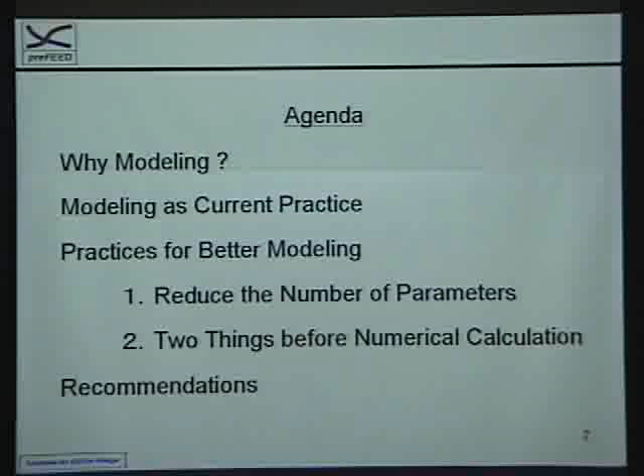Let's talk about the first topic of why we have to focus on modeling.

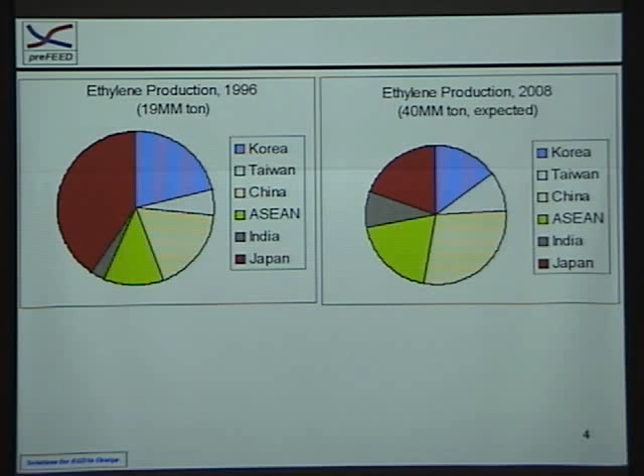And I hope modeling will be the key to the differentiation between different countries and different companies.

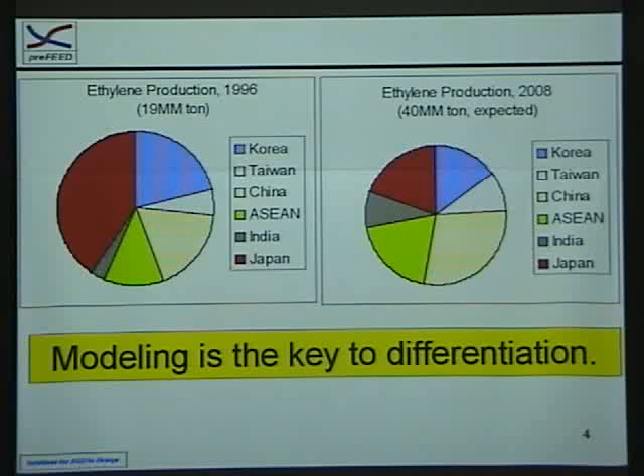I would like to explain modeling practice as current activity.

This is the old diagram, the McCabe-Thiele diagram, and those who are younger engineers may not be familiar with this, but this is technology back in 1970. We had to use this kind of diagram to design distillation columns, such as acetone-water distillation. This technology was limited to the binary system, a two-component system, and we couldn't consider the heat balance.

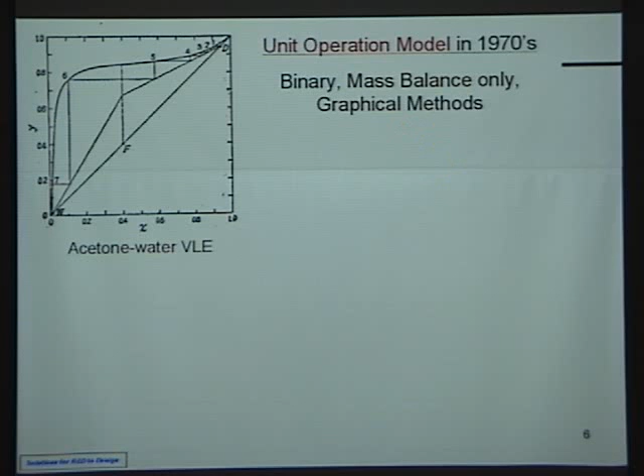We consider only the mass balance, and this was a graphical method. So if you have the VLE very close to the operating line, then accuracy depends on the accuracy of the VLE. So the graphical method didn't give us high enough accuracy back in 1970.

And today, well, this is 1990s technology. We enjoy quite a big improvement from this innovation.

This is a model of the distillation column today. We can consider heat to the trays, side draw, decanter, and we can also consider vapor distillate. So we can consider many operating conditions these days.

The difference we have is the multi-component, stage-to-stage calculation, heat and mass balance calculation, and we can also use three-phase distillation calculation.

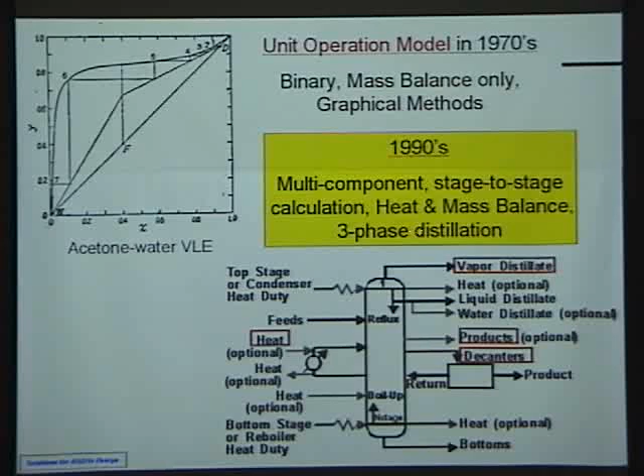Let's consider the VLE model and how we have made progress in representing the VLE. This is acetone-chloroform VLE, which is known to be very difficult to represent.

Back in the 1970s, empirical activity coefficient models were used quite extensively. This is Margules' equation, and we can see this Margules' equation reasonably fits well to the measured data of the P-X-Y diagram.

But if you look more closely at the accuracy of representing the PXY diagram, then we can find big differences, errors, in correlating the result. So these are the errors in correlating the PXY diagram.

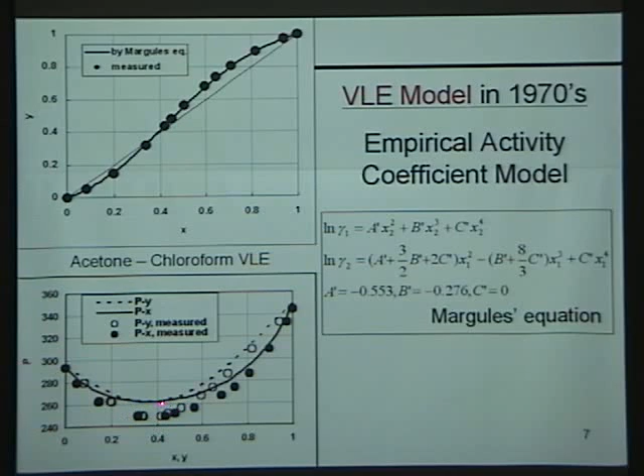As a result, a new, more rigorous method was developed by Prausnitz, and this is the UNIQUAC equation. There are many parameters, but using this more rigorous method, we can now rigorously represent the PXY diagram of the acetone-chloroform system. So again, we are now enjoying the benefits from the development of technology over the last 20 years.

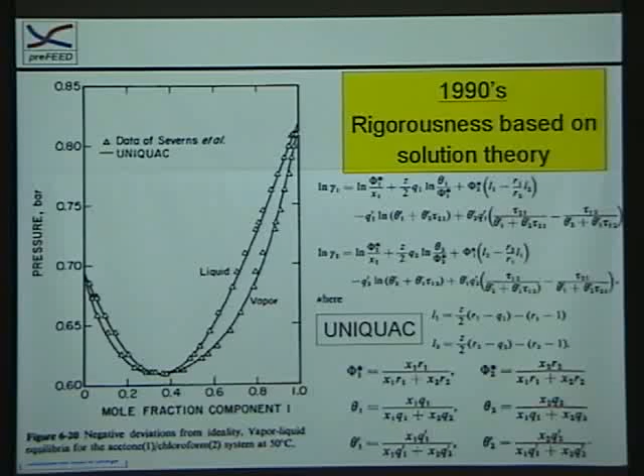So I would like to mention that in modeling and current practice, we are getting benefit from the rigorousness to represent data. Every day, all the engineers in industry use process simulators to calculate at this rigorous level.

My topic today is related to another aspect of these modeling methods. I would like to briefly explain the shortcomings as well. The first one is if you want to use a model like UNIQUAC, we have to prepare many parameters.

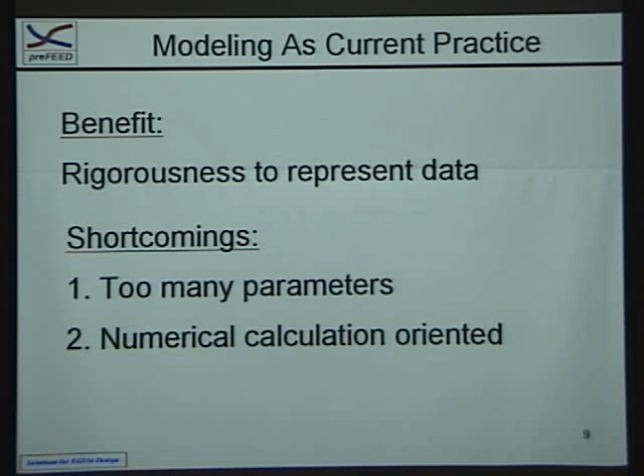And also, I would like to discuss the shortcomings related to numerical calculation orienting. Because computers have progressed over the last 20 years, we can now perform very complex calculations. But at the same time, there are things we have to do before we start a numerical calculation. So I would like to touch on these two points.

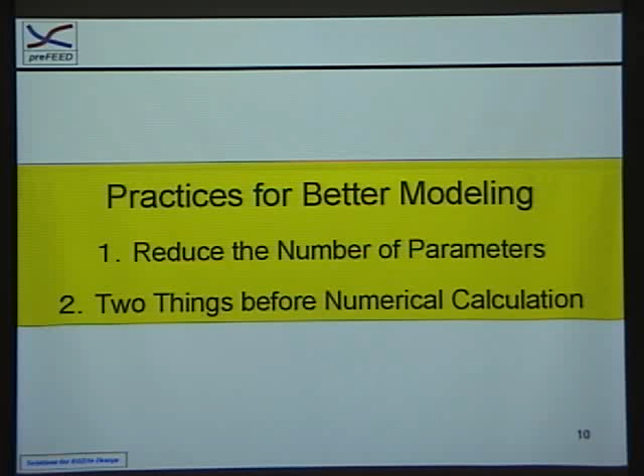Regarding the practices for better modeling, firstly, I would like to talk about reducing the number of the parameters and then two things before numerical calculation.

Let's talk about the Antoine equation as an example related to the number of the parameters. I guess everyone in this room is familiar with Antoine equations, which is related to vapor pressure representation.

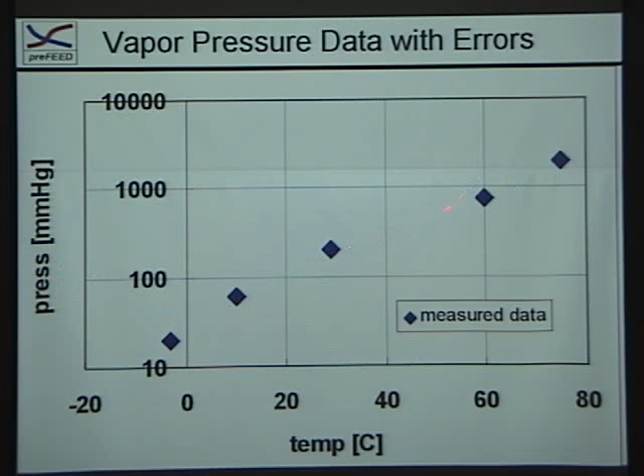Suppose we have a vapor pressure measurement, like temperature versus vapor pressure. We have some errors, of course, in this experimental data. There are actually many equations available to represent vapor pressure. The most well-known one is the Antoine equation. The Wagner equation is also well-known, which is applicable close to a critical point.

The DIPPR equation is also familiar, and extended Antoine, this is in case of the AspenPlus representation. So we have these equations.

I would like to show the comparison of Antoine equations and extended Antoine. In case of Antoine, I just set C equal to 0 so that we have only two parameters for the correlation. In case of extended Antoine, I use the parameters from A through E, a 5-parameter equation.

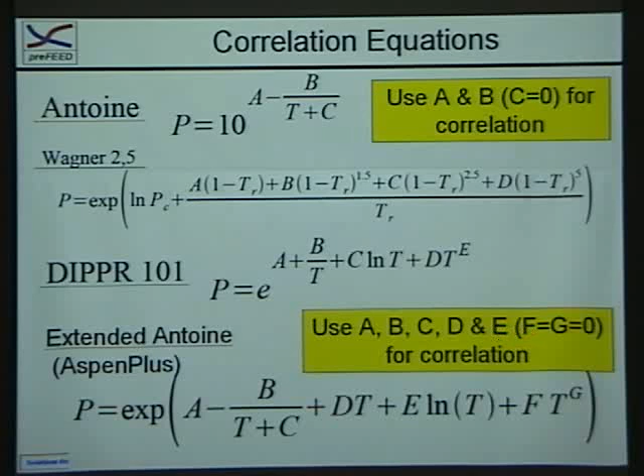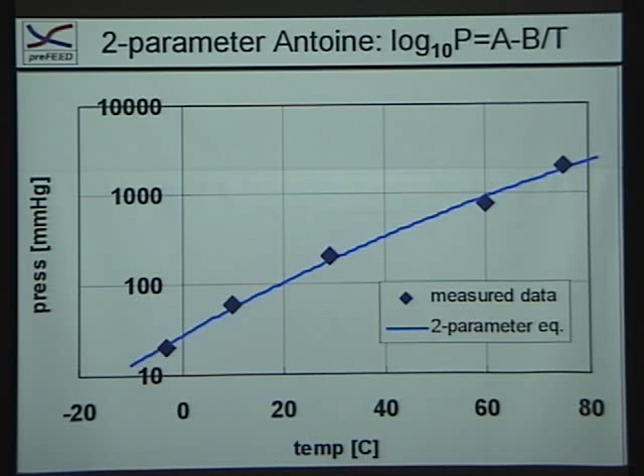If we use the 2-parameter Antoine equation, we can correlate the measured data, but of course we see some errors here. The error comes not only from the equation itself, but also from the error of the experimental data.

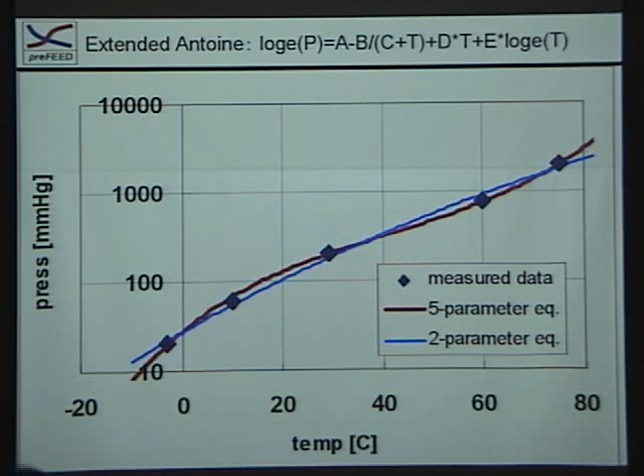If we use extended Antoine, we can rigorously represent all the measured data here. So in this sense, the 5-parameter equation is more rigorous. But if we extend the calculation beyond the range of the measurement, then we have this quite strange behavior.

So if we use too many parameters, it's quite tricky to extend the correlation outside the range of the correlation.

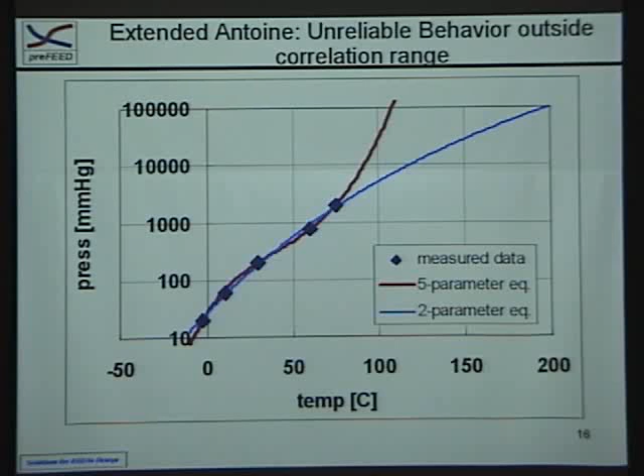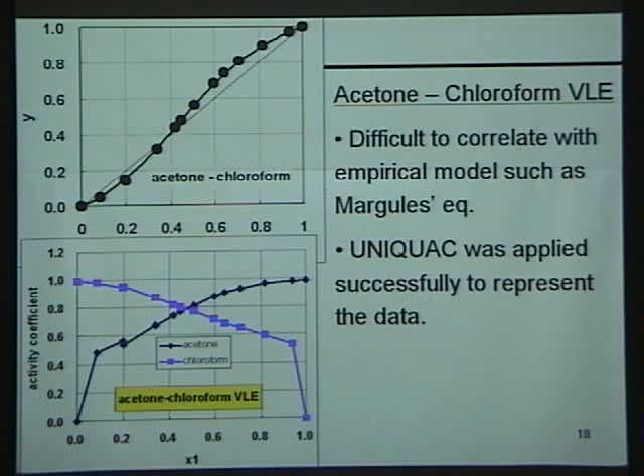I would like to explain the background of the UNIQUAC model, which is related to Wilson and NRTL as well. We have vapor and liquid phases here. In the vapor phase, we have molecules randomly placed like acetone and chloroform, uniformly.

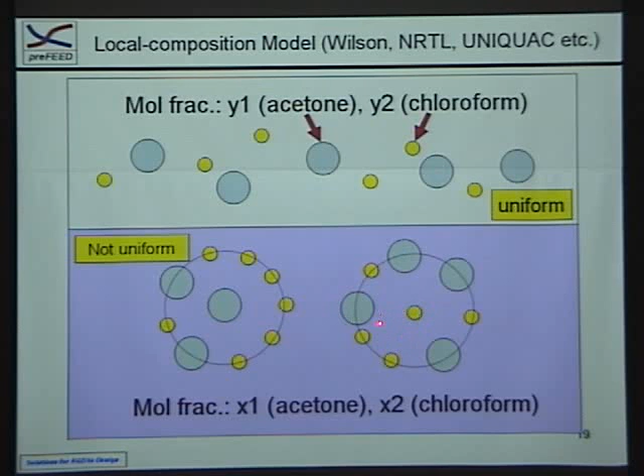But in the liquid phase, these equations have some assumption that the liquid phase is not uniform. So around the acetone molecule, we have more chloroform, and around the chloroform molecule, we have more acetone.

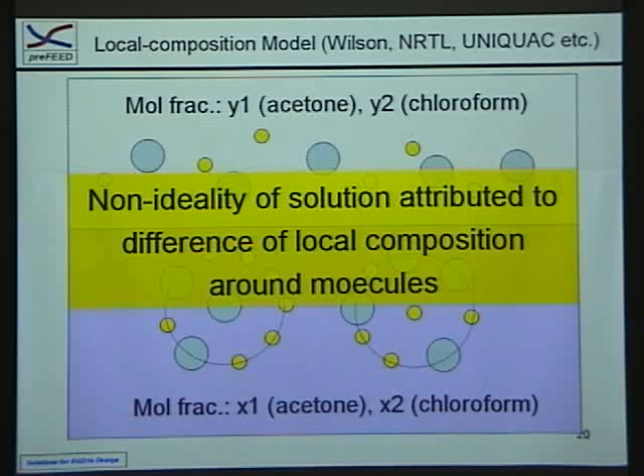So in this sense, non-ideality of the solution is attributed to a difference of local composition around molecules. We call this model the local composition model. We have an alternative approach, which is called the chemical theory.

In the case of chemical theory, again we assume uniformity in the vapor phase. But in the liquid phase, we also assume this liquid phase is ideal—ideal, but with a ternary system.

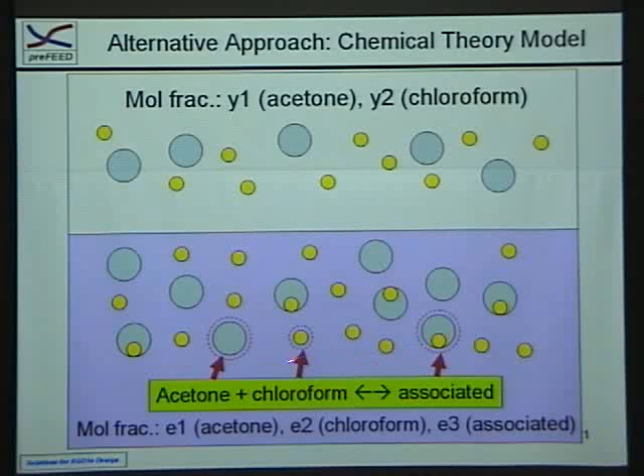Three components: acetone, chloroform, and the associated compound between acetone and chloroform. So instead of assuming the composition is locally different, we use the assumption that the solution itself is ideal. We just need to consider all three species. Considering all true species resulting from association allows us to model the system as an ideal system.

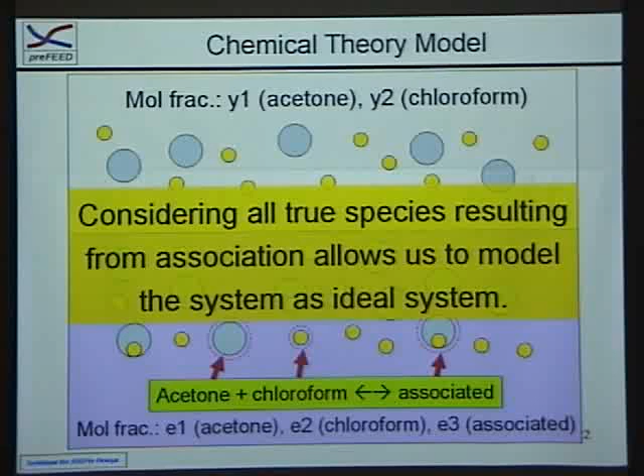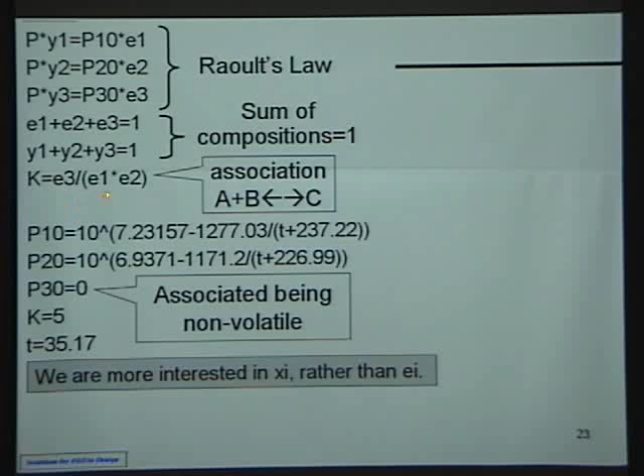In this case, we use E's, which is the true mole fraction of 3 components: acetone, chloroform, and the associated molecule. But we are more interested in X, the mole fraction of acetone. So for the calculation we need mole fractions of 3 species, but we are more interested in X. This is the relationship between true mole fraction and apparent mole fraction.

Suppose we have 1 molecule of acetone, 3 molecules of chloroform, and 2 molecules of associated compound in the liquid phase. When we sample the liquid, we usually use gas chromatography for the analysis.

If we put heat into this sample, the associated compound will dissociate because of the heat. So we now actually have 3 molecules of acetone and 5 molecules of chloroform. As a result, when we measure the composition by gas chromatography, what we observe is X1 and X2, which are different from the true mole fractions. So we are more interested in this phase.

With this explanation, we can now convert E's to apparent mole fraction. The total number of molecules are E1 and E2, but we need to double the number of molecules for E3 because it will dissociate into 2 molecules. So we need this factor.

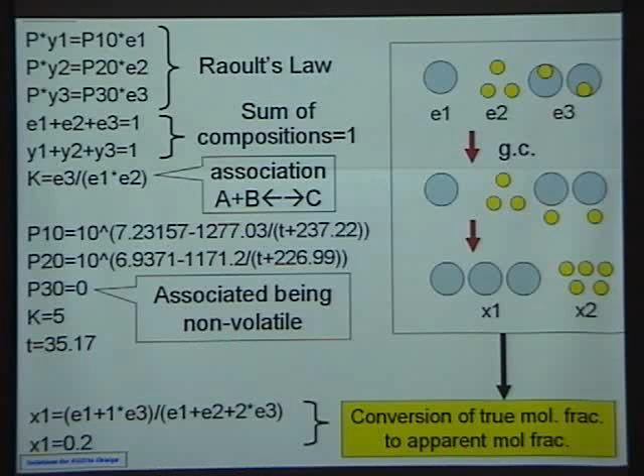With these equations, we can now calculate this. If I use K being 0, that means we have a 2-component system, ideal system, strictly following Raoult's law. So we have this diagram - the XY diagram is very close to the diagonal.

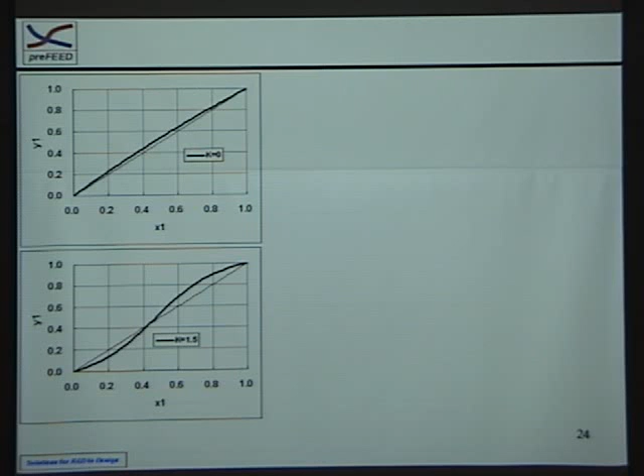But if I use K being 1.5, suddenly the system exhibits non-ideality. Although we use the ideal calculation, we just included the chemical reaction in the vapor equilibrium. If I change K, we have different curves.

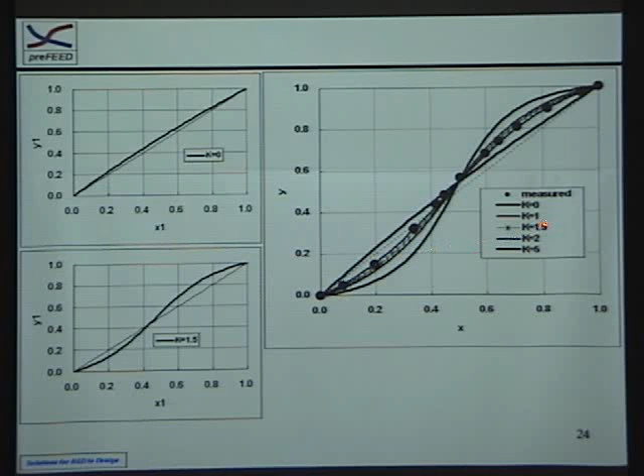And now we can have a better understanding that K being 1.5 is very close to the measured data. But as a result, for the XY diagram and the PXY diagram, surprisingly, the PXY diagram is reasonably well represented with ideal equations.

So one adjustable parameter - in this case, remember, we just used K as the adjustable parameter. In case of Margules, we saw first, we used 3 parameters. In case of UNIQUAC, I don't know how many parameters I have to use.

But in this case, just one adjustable parameter with single component, and also this parameter - the uniqueness of this method is this parameter has a physical meaning. If we use Margules or UNIQUAC, we don't know the parameter's meaning. But if we use this chemical theory, the parameters we use are much fewer, and this has physical meaning, which is very beneficial for engineers.

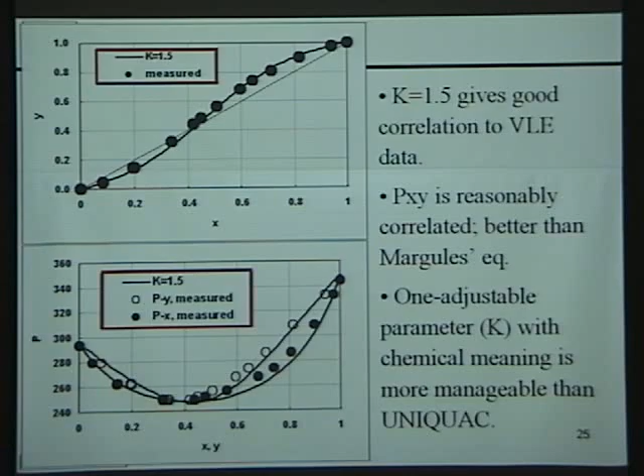Let's consider very simple reactions, or 2 competing reactions. A plus B forms C, which is the desired product, and B plus B forms D, which is an impurity. Suppose we are at the early stage of R&D, so we don't know exactly the rate constants yet.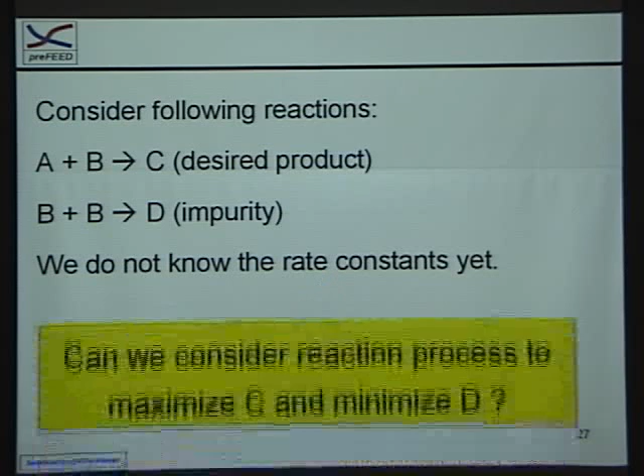But we would like to consider the reaction process to maximize C and minimize D, because C is the main product. We want to maximize C, but we don't want to have D. We want to reduce D. But we don't know the rate constants yet. What should we do?

One idea is to just start a numerical calculation. In order to do a numerical calculation, we have to assume K1 and K2 for the two reactions, and we have to determine the flow sheet. Let's suppose a CSTR, continuous stirred tank reactor, and the number of stages. We also have to determine the A to B molar ratio at the feed, and the conversion of A, which will allow us to calculate the residence time. So if we want to start a numerical calculation, we have to determine all these things.

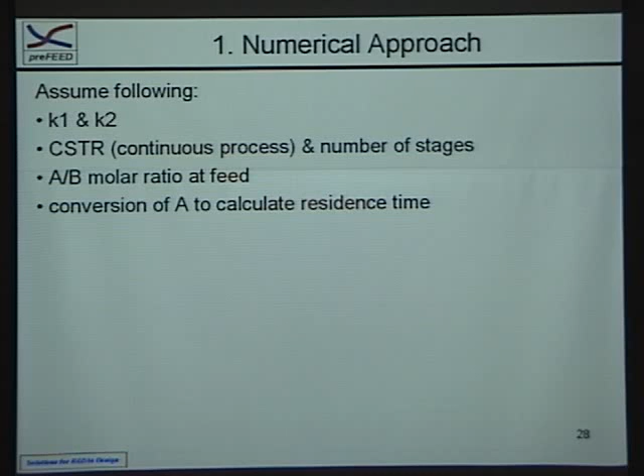And then we can calculate - this was a trial simulation. Of course, in order to find the optimum point, we have to run many more cases, varying K1, K2, number of stages, molar ratio, conversion of A, etc. We seem to have too many assumptions, and we want a better approach.

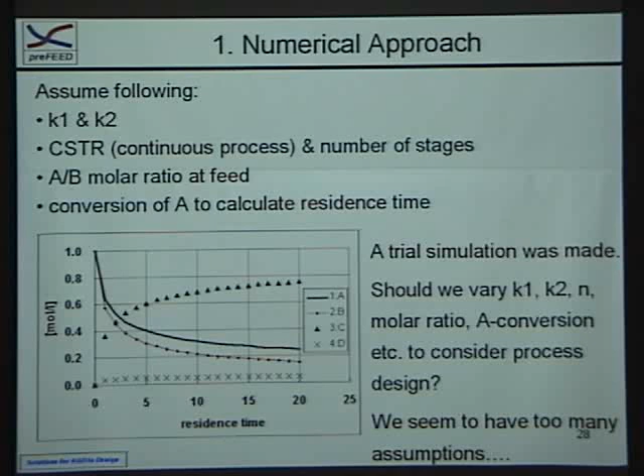One better approach would be an analytical approach before numerical calculation. We can derive differential equations based on these two reactions. Even if we don't know K1 and K2, we can derive these differential equations to describe the changes in A and B.

Dividing these two equations by themselves gives us this differential equation. This is a linear differential equation, and actually we can solve this equation analytically.

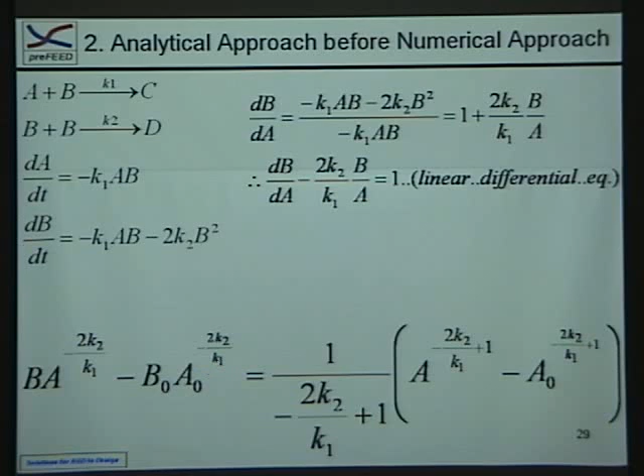This is the result. The result seems very complex, but the important point is the parameter K2 to K1. So as long as we select the K1 to K2 value, this determines the reaction performance.

I think this kind of analysis gives us a better understanding of the process, before we use numerical calculation, which also gave us some information. But this analytical approach also gives us better understanding. But this is not everything we can do.

We can also consider equations even before solving them. In the previous step, we solved the equation analytically. But let's consider, can we find more information before solving them?

So again, we have these two differential equations. We are more interested in C and D, because C is the main product and D is the byproduct. We can derive differential equations for C and D. By dividing these two equations by themselves, we have this differential equation.

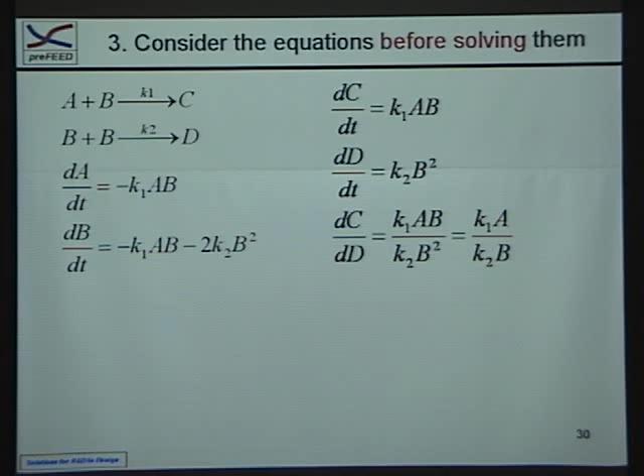So what is required to maximize C to D? To maximize C to D, we need to maximize this term on the right hand side. So A to B must be maximized, and B must be minimized.

Then we can draw the conclusion that B must be added in small portions, not added at the same time as A. This equation tells us this is the way we should construct the process.

So by having these approaches, starting from numerical calculation, then analytical solution, then interpretation of the equations themselves, our understanding becomes better and better. Actually, these approaches gave us a much better understanding than before.

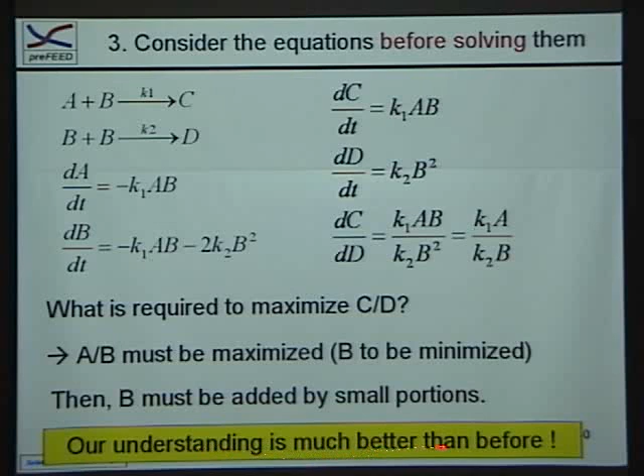And this is the industrial practice for the alkylation. This is A plus B to form the product, and B plus B to form the byproduct. So in a sense, this is the same manner.

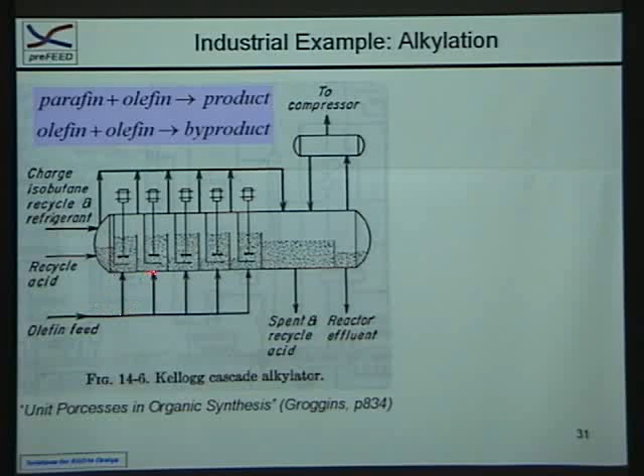We can see actually the feed: A is fed at this point, but B is fed separately. So we cannot apply these equations rigorously to this process, because this is a gas absorption process, including the absorption. However, the interpretation of the approximate equations can give the right answer for conceptual design.

So even without numerical calculation, we can actually consider this kind of configuration if we consider to interpret what the equations mean.

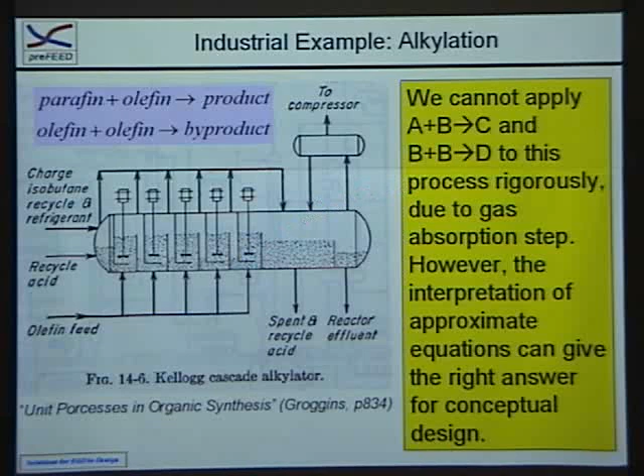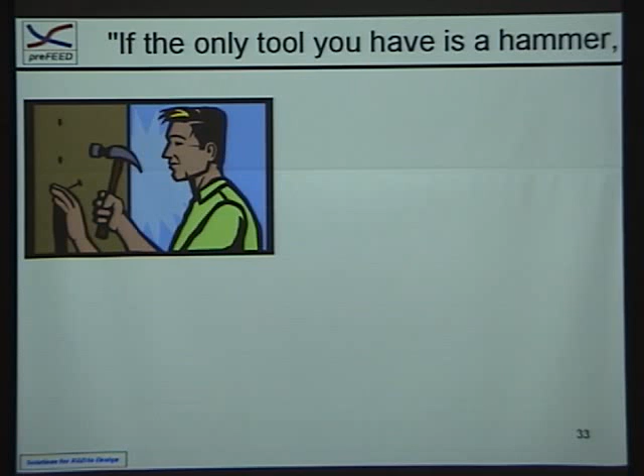Finally, I would like to make some recommendations. There's an English saying: if the only tool you have is a hammer, then you will treat every problem as a nail. There are many activities for carpenters, but if the only tool you have is a hammer, you have to use a hammer for every task, which is ridiculous, of course.

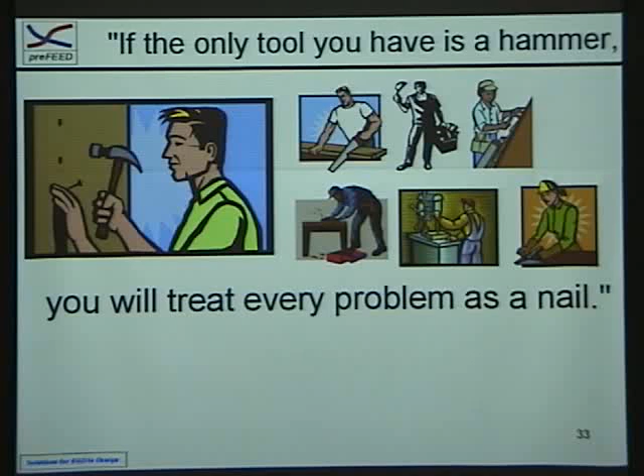But the simulator is not the only tool you have. I think it's very important for us to use appropriate methods. Experimental work is, of course, important for us to use to build a model.

And of course, simulators are very helpful. As we saw at the beginning of my presentation, there has been tremendous development and progress in calculation using process simulators. This is very beneficial, and I have no doubt that in the future we will continue using process simulators. So process simulators give us important benefits.

But finally, I would like to focus on the fact that our own modeling is also important. By putting our effort into building equations, trying to interpret them, and trying to build a model with fewer parameters, these are the keys to building better models, on top of these two activities.

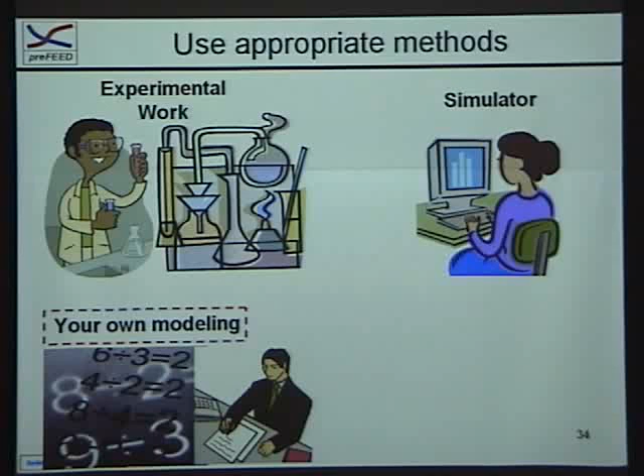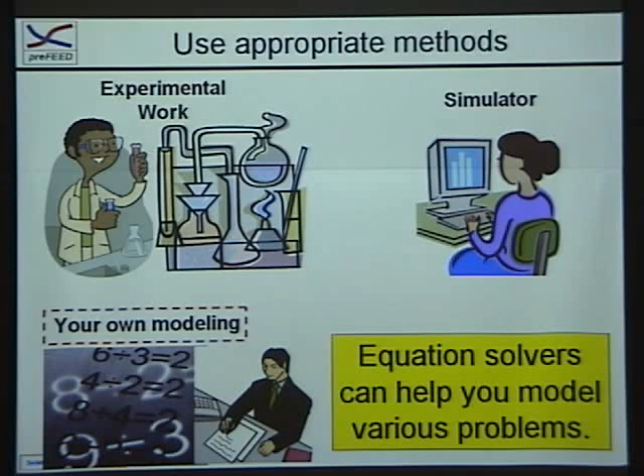Equation solvers can help you model various problems these days, and unfortunately I don't have enough time to show the demonstration. But I can show the demonstration if some of you are interested, after this morning's session.